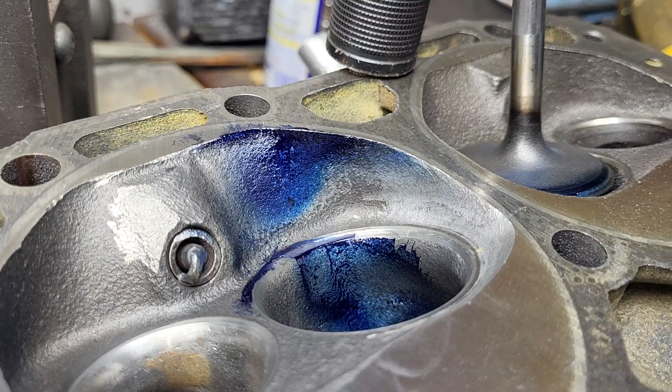Okay guys, this is the throttle body injection job with the fifth cut on the 194. It's still a 45 seat. The only thing I did is bring out the divided wall between the two cylinders till it was paper thin - you can see it starting to dent with a rough burr. I wasn't going to spend an hour making it perfect because I don't care, this is the junk head. I just needed to take the area out and see what it would do.

As far as our liquid is concerned, not bad really, really not bad. You got to remember, this is a lot tighter chamber, right? Smaller valve, way smaller bowl. It does have the same cut as last time you've seen it as far as the ramp, but the ramp is going to work differently now that we added area to the straight wall side.

How does our valve look? Damn good, damn good. You know what's really interesting? Compare it to our done to the max 2.1. Interesting, right? Not that much different, really. Even after I changed so much stuff, the liquid still comes around pretty close. Let's see what the bore looks like.

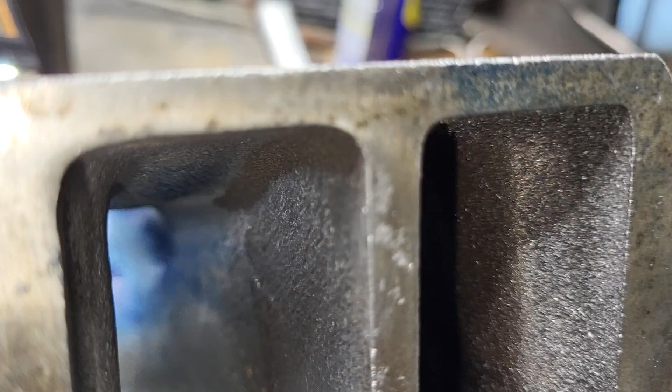Okay, you can see on that wall where it's starting to dimple. Now I used a very aggressive burr on that - this giant, well I wouldn't say giant, but it's got giant teeth on it, double cut. It's actually supposed to be for aluminum, but I use it on iron because I don't listen to anybody. And basically I brought that wall as straight as I could without breaking it through.

On the short side, you're able to move it over quite a bit. So that added a lot of area to our short side.

Okay, the roof hasn't been touched really, it's stock. We do have a big cut on this side - we did that on another cut before. Not really thrilled with the shape of that, but it's all right. It was a loser, but I figured after we took area out of the divided wall, it wouldn't be a loser anymore. We'll see whether I was right with that or not.

And all the way up through to the plug, really not bad as far as our liquid goes.

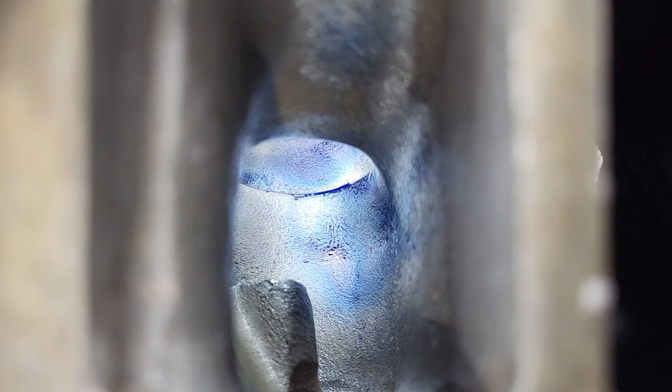Okay, no flow sheet, so I did have to fire my wife because it's her job. So I just told her she's fired.

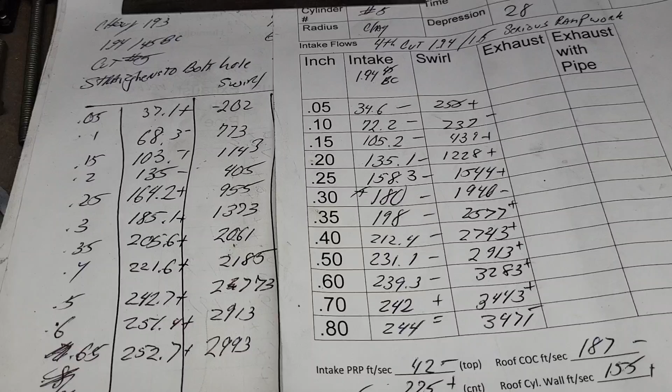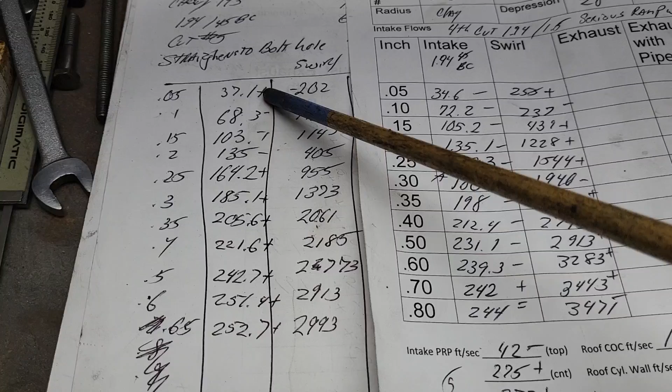No big deal. Okay, this was the fourth cut, but this was a loser. Let's compare this one, and then I'll see if I can find the third cut. I should be able to. All right, we got a plus, a minus, a minus, a minus, plus, plus, plus, plus, plus.

Now I used a different retainer, so I wasn't able to go as high a lift. I didn't realize the other retainer I used was taller, so it hit the guide bosses faster. But we got some decent gains in here.

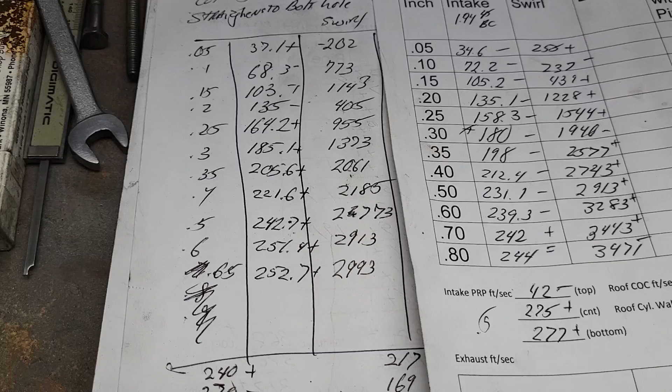You got 5 at 300, and like 500 here, you're up almost 12. That's a nice gain - you can get that with a decent street cam. 242, that's what, 12, 13 more than a standard Vortec is going to put out with the same size valves.

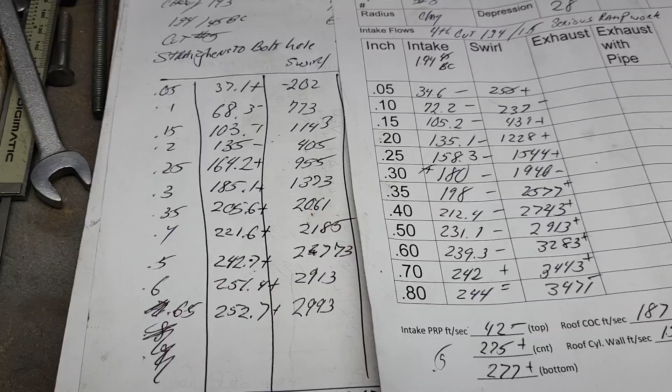I'm doing this for guys that are broke. They got a set of these - you're still going to have to put guides in it, you're still going to have to get the seats done. So this is what you can do with a decent amount of grind and not a huge amount.

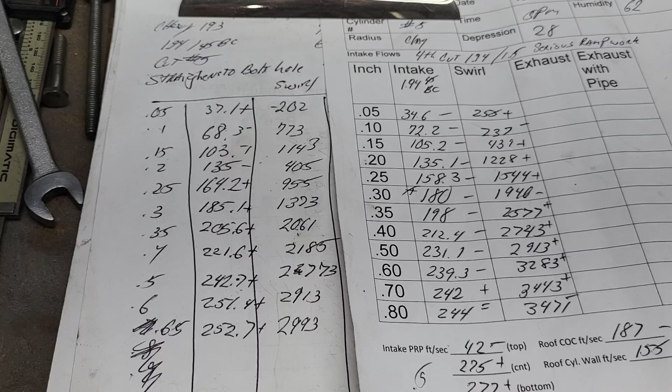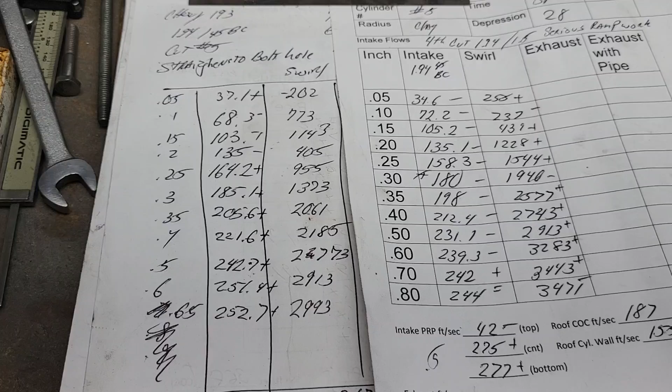The pinch got rounded and opened a little bit. The short side got wider a little bit. I took that notch out of the ramp. A little bit of work in the chamber, a little bit of work in the bowl. In fact, it's probably a relatively tight bowl ratio - let me measure that for you guys.

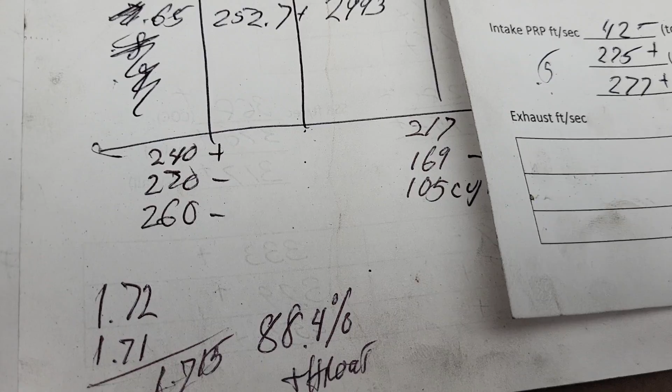Okay, that's what our throat is, 88.4, which is about where I like a 45. But remember, it's a different bowl design. It actually likes the bigger throat.

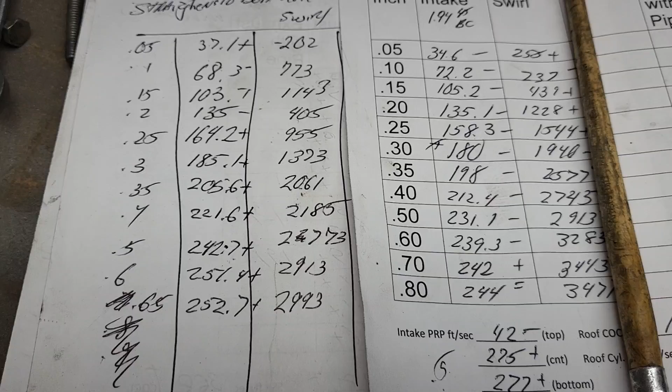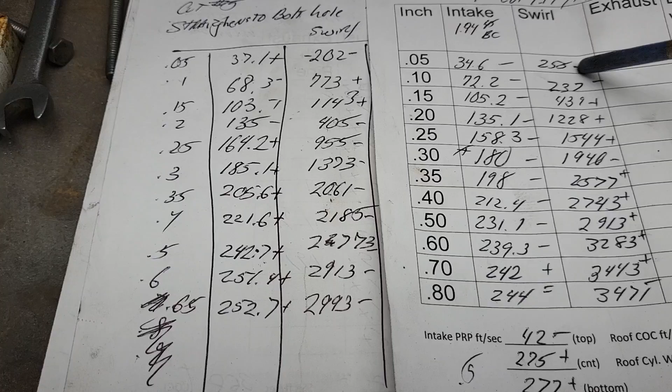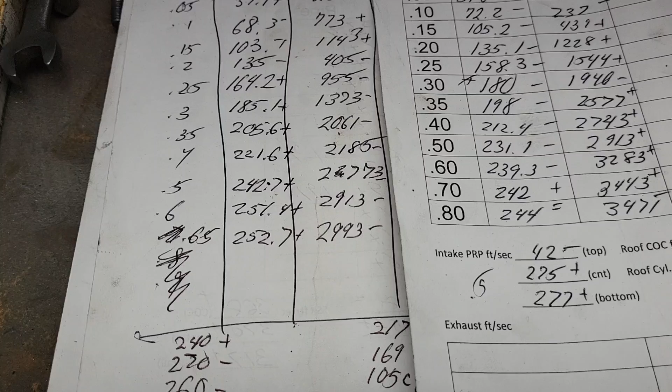Let's take a look at our swirl. Our swirl's kind of interesting because it does change quite a bit from the last one. It really is interesting what happens to the swirl curve, right now that you give it some more short side and more area on the other side of the bowl. This was actually a negative 202, this was a positive 255. So you've got a minus, plus, plus, minus, minus, minus, minus, minus, minus. The rest of it's minuses. Interesting to think about.

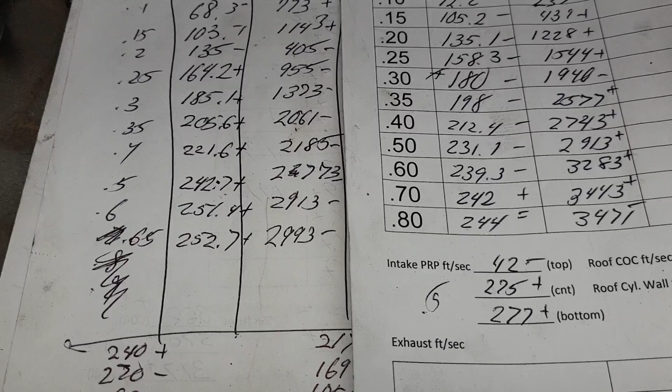All right, let's do the air speeds, and then we'll grab that other cut, because this fourth cut was a loser. We'll compare this one to the third cut, which was a winner.

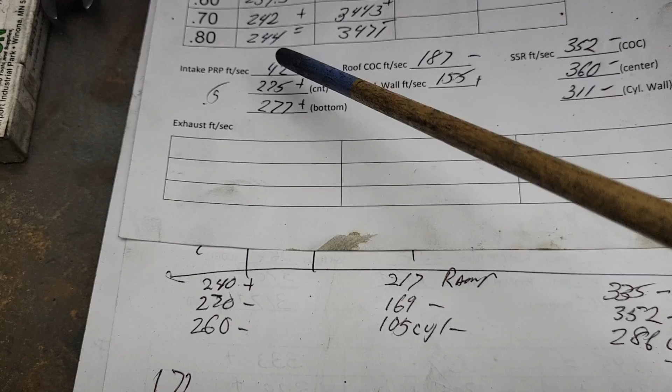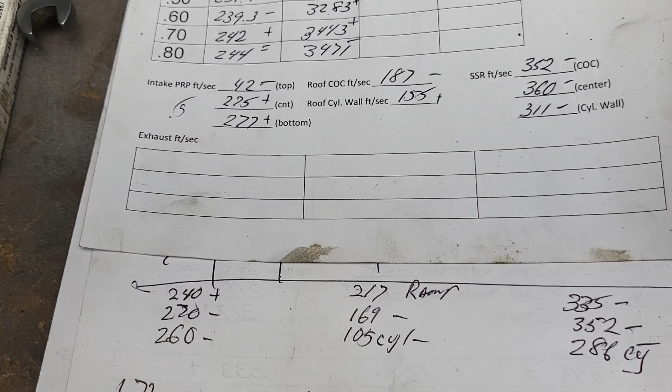Okay, top was our last cut, handwritten. Crapola is this one. Plus, minus, minus as far as speeds. Look how dead it was on the roof here. Wow, okay, went down, went down. I measured the roof a little bit differently. Look how fast that - not roof, the ramp - the edge of the ramp, I can get the speed off of, and it's screaming at 217 compared to how slow these are, right?

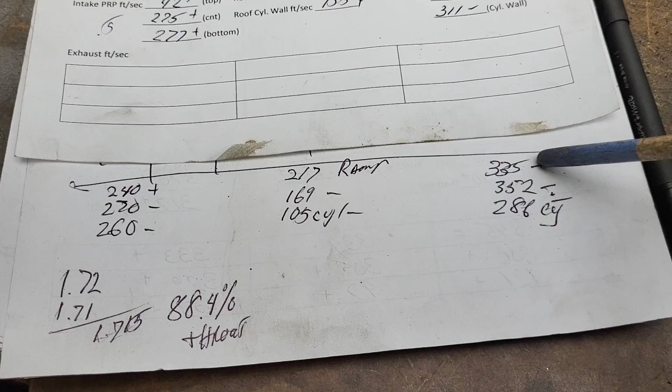Which makes sense, you've got to have that air moving up the ramp, and that's where you're picking up that speed. As far as the short side, minus, minus, minus. It's got more area, so you'd figure it would go down. Let me see if I can dig up that other flow sheet and we'll compare it, see if it actually is a winner.

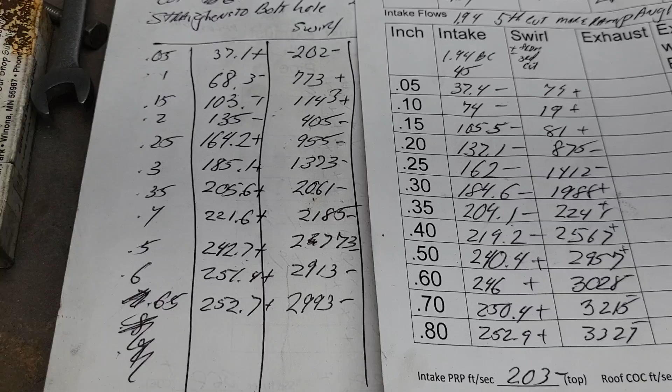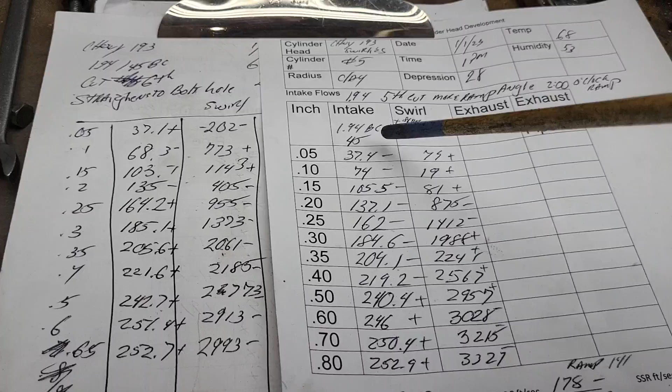Okay, guys, my mistake. I missed this flow sheet. The last one that was a loser was the fifth cut. This is actually our sixth cut. No big deal, this is the one that was a loser. Look at how many losers we have, but we got a little gain at the top.

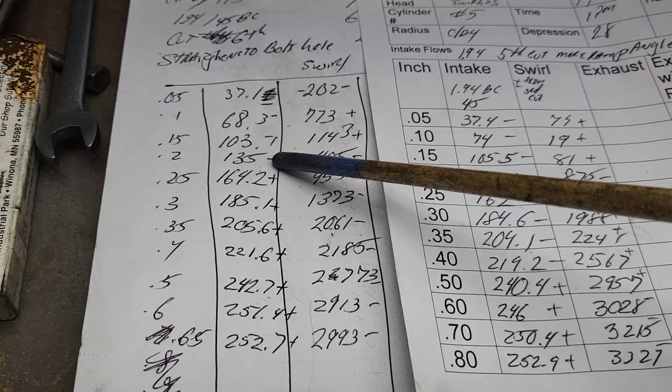I wasn't happy with that. How is it compared to this one? Let's do different pluses and minuses. Okay, really didn't have to change much. Minus, minus, minus, minus - all the low lifts lost a little bit. And then pluses all the way up. So how'd we do?

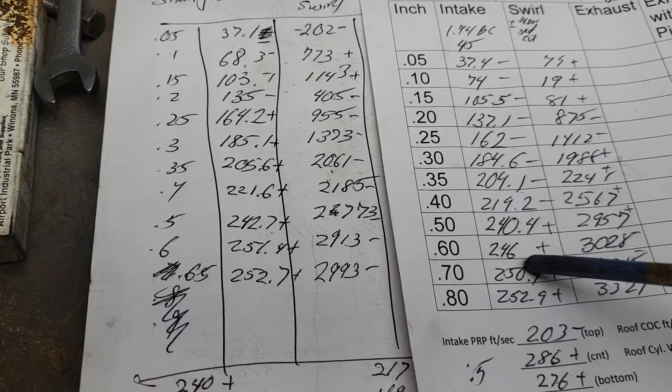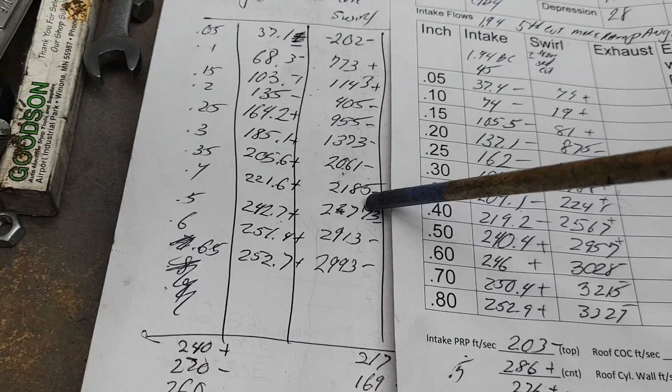I'd still take this one. I like the extra area around that bowl. As far as our swirl, these really didn't change much either. Minus, plus, plus, minus, minus, minus, minus, minus. And that street lift's 2,700, 2,900. I'll take the 27, thanks.

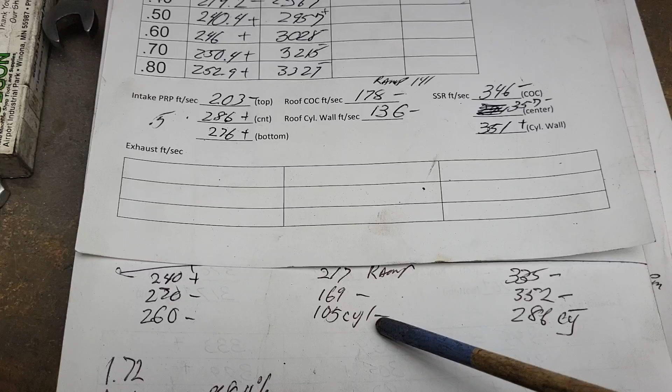Let's take a quick look at those air speeds. All right, as far as our pluses and minuses, none of them have changed. Now, I measured the ramp speed here, but I measured this ramp speed differently, so you can't really compare that ramp speed to this ramp speed. But we got a plus, minus, minus as far as our pinch. We've got a minus, minus on the roof. We've got a minus, minus, minus on our short side.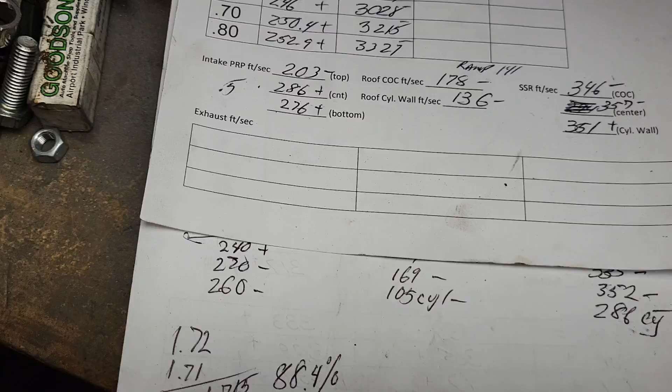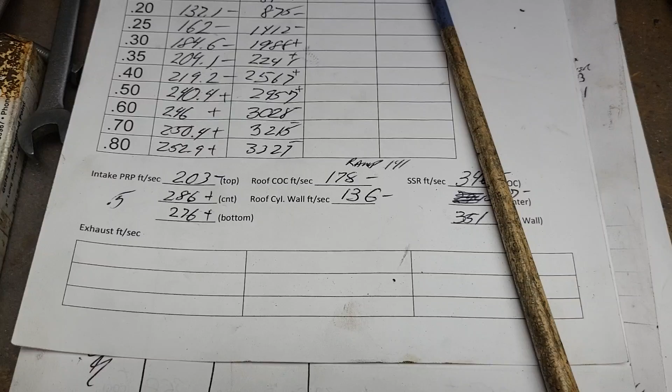But at 500, we're flowing more. Are we flowing a lot more? We'll go from 240 to 240.4. Not much. In any case, I like taking that area out. I don't know whether it's worth it to break through the boss for a 194. I doubt it.

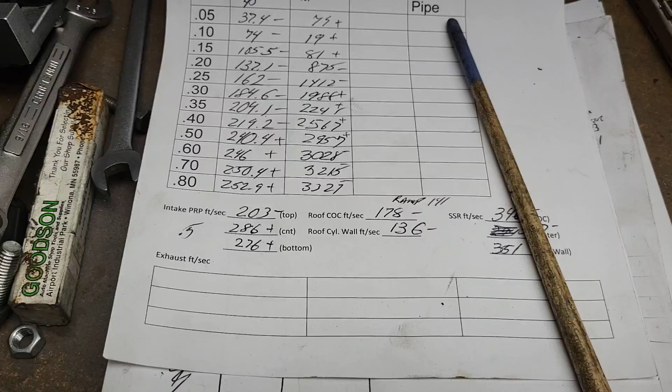Okay, not really a bad cut for someone that wants to get some decent performance out of throwaway heads. Now, in reality, it might be a touch better if we had that ramp back a little bit more. Right now it's maybe 2:30, maybe it would be better at 2 o'clock, but we're already past that point. I don't know if I'm going to do another one of these this size.

I think the only other thing I'm going to do to this 194 is I'll cut it for a 50 and give it a little bit more throat, and we'll see what that is. I'm willing to bet that's a winner. And think of it this way - if you've got to get a valve job, it shouldn't cost any more to put a 50 on it than it does a 45. I mean, in reality, it really shouldn't cost any more money. So I'm willing to bet we'll gain probably about 5 CFM in the higher lifts with a 50. We'll find out.